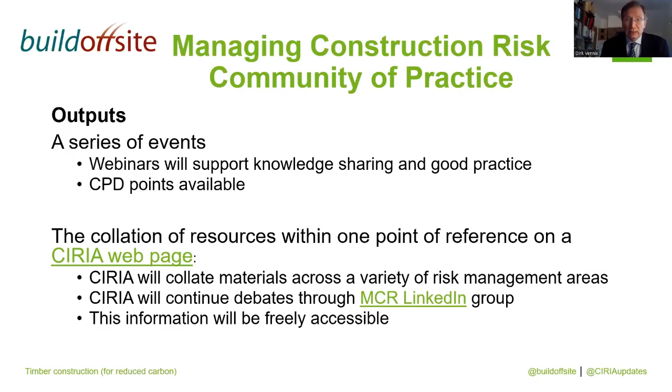We've put all the resources we can find - guidance, regulations, thought leadership articles - in one portal, which you can find on our resource page on the CIRIA website. We also have a debate going on in the LinkedIn space, so you can go to managing construction risk and join that group, and we will be putting some of the questions, if we don't get around to them, on that page later on.

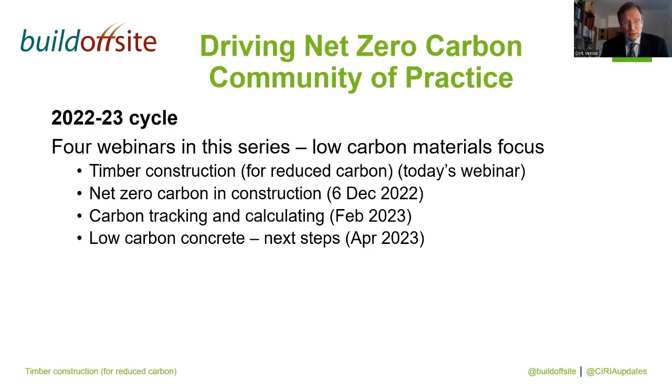One of the advantages of being involved in the forum is that you get to contribute, steer the agenda, speak at webinars, get involved with them, and possibly also help steer the guidance, because I mentioned the decarbonisation task force. Hopefully there'll be some guidance coming out of that to see a way through, which is often a quite crowded and dense market space.

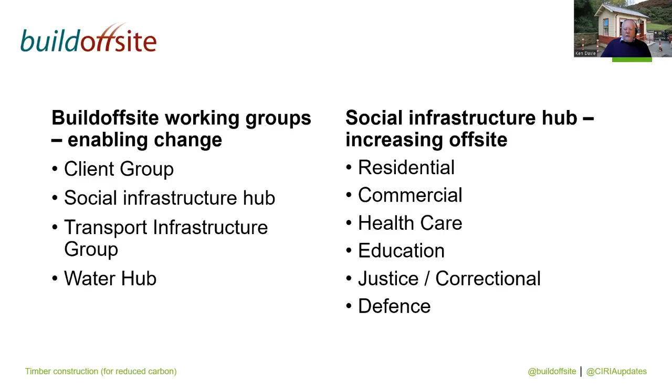But it's time to move on and to concentrate on the topic of this morning's webinar. This is our programme for the day. As you'll see, we've got 4 very interesting topics. Each speaker will be doing around 20 minutes. We keep our Q&A session to the end.

Our speaker lineup for this morning includes John Smith from Donaldson Timber, David Miller, and others - I won't actually read all the rest of this out. So at this point, I think we're ready to ask the first speaker to pick up the reins. John has considerable experience in the timber frame construction sector, having worked with Donaldson Timber for a long time. So I'd like now to hand over to John Smith.

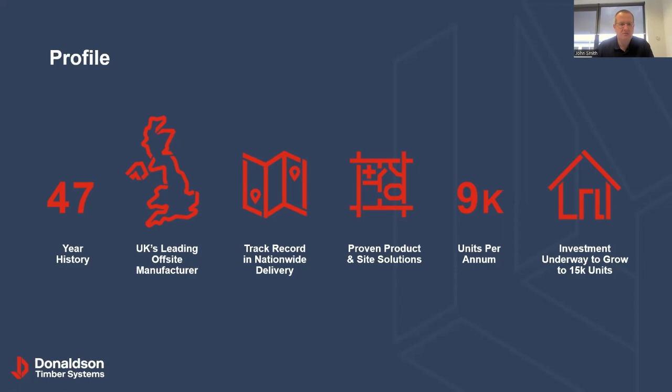I'll touch on some of the other tenures as I go through this morning. We cover UK-wide supply, with a range of products developed over the last 47 years, proven solutions for the offsite sector. Currently we manufacture and supply around 9,000 units a year, a unit being a house or an apartment, and we're investing to grow that over the next 5 years, up to around 15,000 units, with some innovation and advancements in our factories.

UK-wide, we've got 2 main hubs where we have our factories and back-of-house operations: one in Aberdeen, where the company was founded, with the factory and our design, procurement, HR and finance support teams, and another factory in Witney, just outside Oxford, which is now our head office, again with a similar setup of factory and full support team.

Our newest addition to the business was a spoke, if you like, in Falkirk—a manufacturing centre only, supported from the 2 main offices, local to where the work is. We also currently have 2 regional offices, one in Glasgow and one in Milton Keynes, which are office locations only, housing local business development, operations and design teams spread around the country.

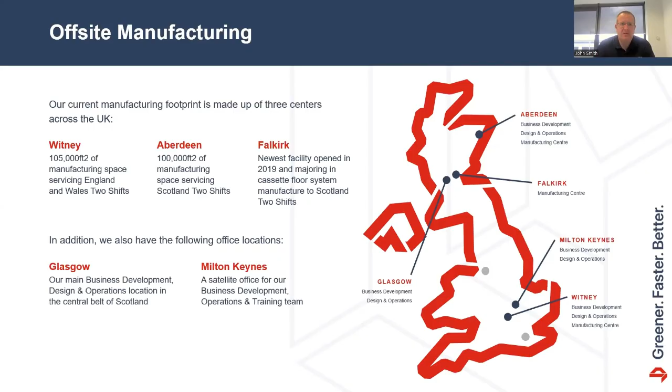The 2 grey dots on the map, one in the northwest, one in the southeast, are the locations identified in our proposals over the next 5 years to grow capacity—opening another couple of spokes so we can quickly establish manufacturing facilities close to where the volume of work is likely to be. They don't exist yet, but that's the plan, alongside investment in the factory, for how we grow capacity.

So a little bit about timber frame and what we've been doing for a number of years. Essentially it's manufactured in factories across the UK. As an industry we've probably got quite a wide range of factories, from fairly low-entry startup manual operations with saws, benches and people with nail guns manufacturing good quality timber frame, right up to where we sit at the end of the scale, with automation and fully automated lines manufacturing timber frame panels and floors.

Running through the system from top to bottom on the images: open panel walls are probably the mainstay of the timber frame market at the moment, and certainly have been for all the years we've been in it. Essentially stud frame walls manufactured in panels, delivered to site flat pack as the structural element of the building, with openings preformed for doors and windows.

More now, as we evolve and as regulations become more onerous, we're moving into closed panel external walls, which are becoming more common—again the same open panel, but with factory-applied insulation, factory-applied internal sheathing boards and service zones, and options for pre-fitted windows. Some companies then take that to the next stage: still timber frame, but with cladding on the outside of the walls, service conduit, and plasterboard on the internal walls.

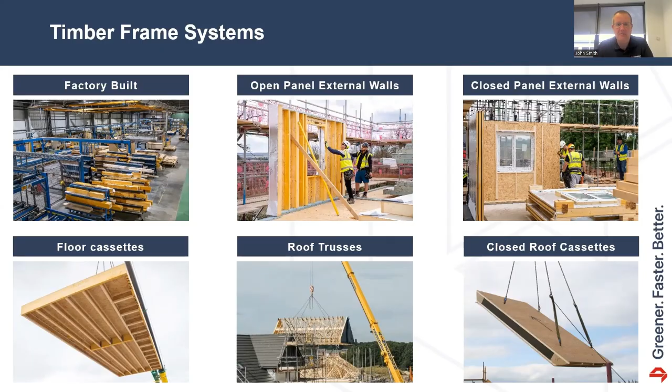Compared to what you'd normally see in a masonry build, that would probably be 6 or 7 weeks to get to that weather-tight stage.

The tenures that we work in across the construction industry, say timber frame, quite commonly used and has been in hotels, student accommodation type residential buildings, low-rise hospital, healthcare facilities, generally single-storey, sometimes 2-storey buildings, schools and colleges as well, quite common and suitable for timber frame.

But the main part of the market, and certainly the main part that we as Donaldson Timber Systems are involved in, is essentially around low-rise housing and low to medium-rise apartments.

Generally focused on apartments at 4-storey and below. We can and do up to essentially 6-storey. So we're at that below 18-metre height for timber frame.

To be practical, as a pure timber frame, there are other timber solutions that some other people are going to talk about this morning around mass timber and CLT, the like, that can go above that. But for our focus, timber frame is certainly below 18 metres, and the mainstay of the market is on housing and apartments.

In terms of the use of timber frame, I think as most people are probably aware, across the developed world, it's kind of the more common use of construction in Scandinavia, America, Canada, Australia, New Zealand, and the like. It's certainly the most common form of construction in various guises and prefabricated panels, as we do in the UK, to sometimes stick build on site and formed on site.

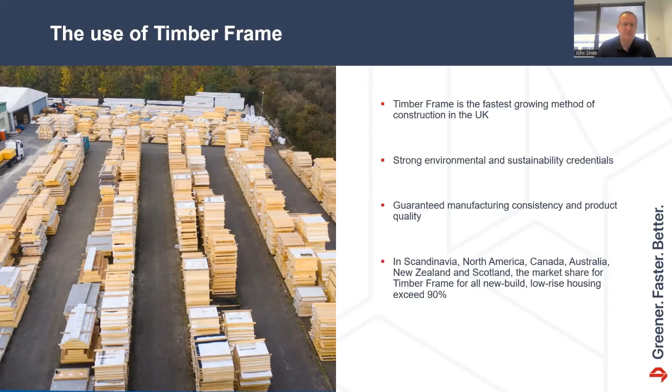And in terms of current volume, where we are, if you look at sort of pre-pandemic levels as the benchmark in 2019, we were up at around sort of 58,000 timber frame units built in the UK. So from a total that year of around 215,000 new housing starts, I think we're probably sitting about a 27% market share across the whole UK.

Scotland, as I said earlier, is a fairly steady market with about 90% of the new houses built, they are in timber frame. The growing market is in England as more and more builders transition over to that for a multitude of reasons that we'll touch on as we go through, and that's certainly growing.

And that's steadily growing from even just in 2016, at around 46,000 units, was about 25% market share, and continues to grow. And then starting a trend again as we recover from the lockdown of the pandemic, housing starts continue, we see that market share continuing to grow.

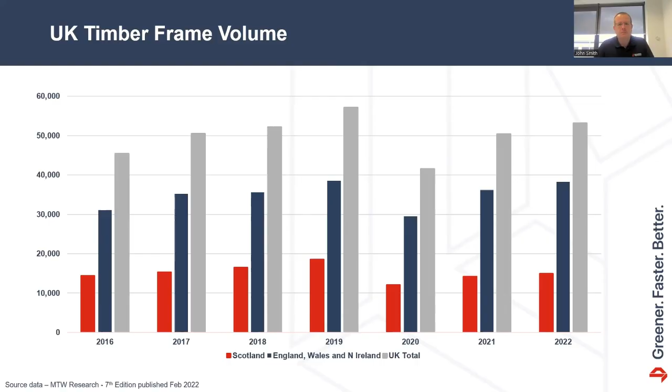They've done that for the last 2 years, and only earlier this year have announced that they're well through manufacturing, building a new factory themselves to increase further capacity in timber frame within Barratt's. We still work with Barratt's and supply a lot of their volume, and will continue to do so, but they're investing in it. Similarly, Miller Homes in Scotland, almost exactly a year ago, purchased a timber frame manufacturer. And in the last couple of months, Avant Homes have done similar. So some of the builders we're working with are looking at that as they work with us and other timber frame suppliers, but they're starting to invest in that as well.

And I think most encouragingly, just in the last number of weeks, Vistry Partnerships and their acquisition of Countryside. Countryside are a housing provider. They have their own timber frame facilities, and they had a facility in Bardon that they weren't going to take forward. Quite good news in the last couple of weeks that Vistry, through that partnership, have picked up that and confirmed that they're going to open that factory up, adding further capacity in the timber frame market over the next couple of years within their own new group.

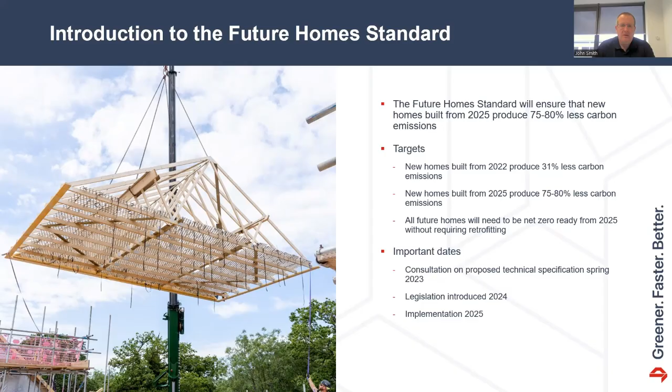Key factors in the standard: the overall target is to reduce carbon emissions by 75%, and within there are three measures. There's the primary energy measure, which is whichever fuel is used to generate the power, be that oil, gas, wind, or whatever, and that applies a fuel factor to how the emissions are targeted.

A measure on carbon emissions, which has always been the measure used through building regs for compliance with the requirements - essentially, as it suggests, that's the emissions from the fuel used to operate the home for heating, hot water, and power.

And thankfully, we've been lobbying for a while for the introduction of FEES, the Fabric Energy Efficiency Standard, which is essentially setting a minimum standard for a high-performing fabric. So it stops the temptation to just replace energy with green energy and still build lesser quality homes. The FEES standard essentially drives in a better standard.

For the technical people on the call, there are some target performance values. Those are likely to be the kind of levels we're looking at, but not defined yet - that'll be part of the consultation.

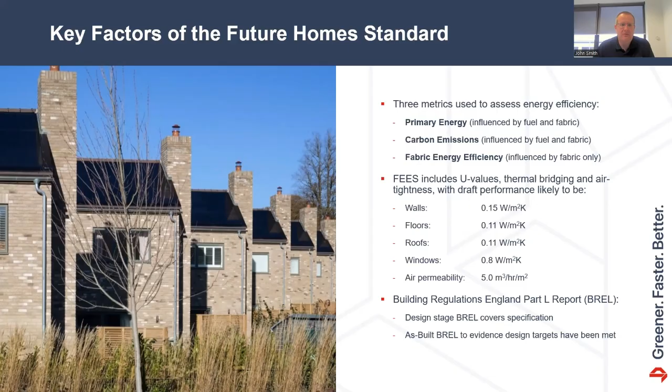And importantly, certainly for timber and timber frame, the introduction of the Building Regulations Part L report - essentially a two-stage process now in place under Part L 2022 - is two-stage checks: design stage compliance with requirements, but more importantly, an as-built evidence target, which includes photographic evidence of key thermal junctions to make sure the as-built performance achieves what the design intent has been. Again, it's a critical step to ensure there's no gap between design intent and as-built performance.

As I touched on, the Fabric Energy Efficiency Standards, or FEES - why is that important? I think it's really key because the target is to reduce the need for energy rather than just using low carbon energy. If we can take away that need by building better fabric, better thermally insulated houses, then that's a benefit.

But also with the very likely change of getting rid of things like gas boilers and the introduction of things like air source heat pumps - all these low carbon heat pumps like air source - they're essentially a low grade heat.

So you won't be able to leave the house over a weekend with no heating on, and when you come in the door, turn radiators on and heat the house up quickly. These things like air source heat pumps, anybody who's got underfloor heating will be the same - you need to keep the house at a fairly consistent temperature. So for them to be efficient, they need to be used in conjunction with a high performing fabric.

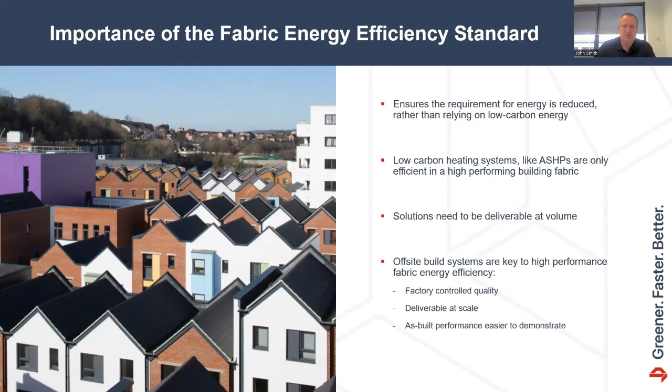And then moving on, embodied carbon - a very brief overview of what that is. Essentially, embodied carbon is the measure of all the carbon emissions for two stages, from cradle to completion, right from the extraction of raw materials. So be that mining ore to make steel, to cutting down trees for timber, all the way through to the construction and all the carbon emissions associated with transport and manufacture of products.

But also at the end of life, at the end of the asset use, be that the house or the building, in terms of a measure of the carbon emissions from demolition and disposal of the materials at the end of life.

Embodied carbon, I think, is key. It's not included as a measure in the future home standard. And I think that's a key thing to consider and make sure that we don't have any unintended consequence.

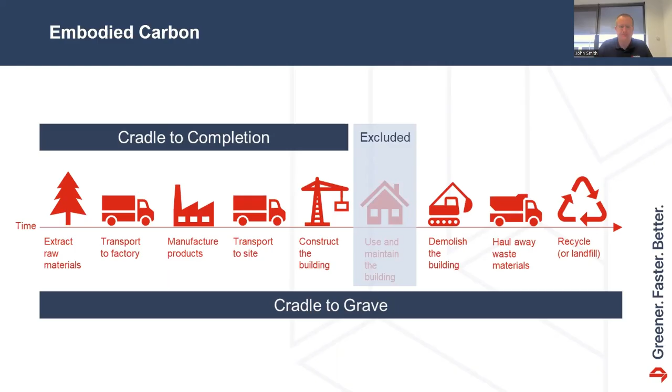Also included in the benefit of timber is carbon sequestration. Essentially, very clearly, when trees grow, they absorb carbon dioxide from the atmosphere, convert the carbon into fuel to grow the tree, and emit the oxygen. That carbon is then stored within the timber.

So very roughly, for every cubic meter of timber that's in existence, whether it be structural timber or any other use, it stores about a ton of carbon within that timber, and that's stored for the whole life of that timber. It holds it in there.

A typical new build detached home built to 2021 standards - whole life carbon, so that's the operational carbon of the home in terms of the 60 or 100 year life of the home for heating, power and maintenance, but also the embodied carbon from cradle to grave - typically is around 200 tonnes of carbon for the life of that home. Of that 200, 165 tonnes are the in-use energy, and 35 are the embodied carbon for the construction and disposal stage.

The point of embodied carbon not being included, going back to the future home standard I talked about - the target is 75% reduction of the operational carbon. So the 165 tonnes of operational carbon in the building, if we achieve everything that's in the future home standard, we reduce that by 75%, so that 165 tonnes becomes 40.

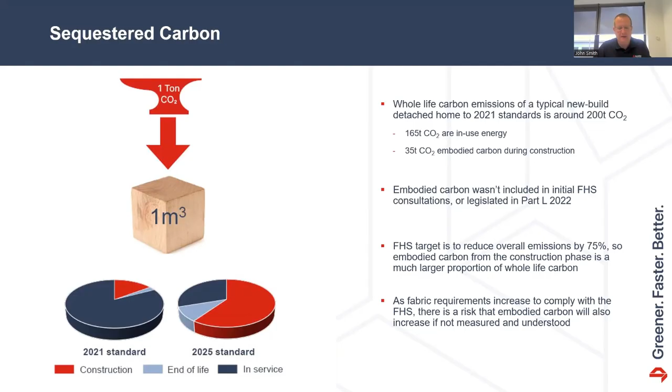In terms of timber frame, again based on 2021 building standards - so what we're building today and for the last number of years - a typical 3-bed end terrace house as an example, just measuring embodied carbon from cradle to completion, a timber frame house saves about 2.5 tonnes of carbon compared to the same masonry house, that being the same masonry house but to the same energy standard and the same performance.

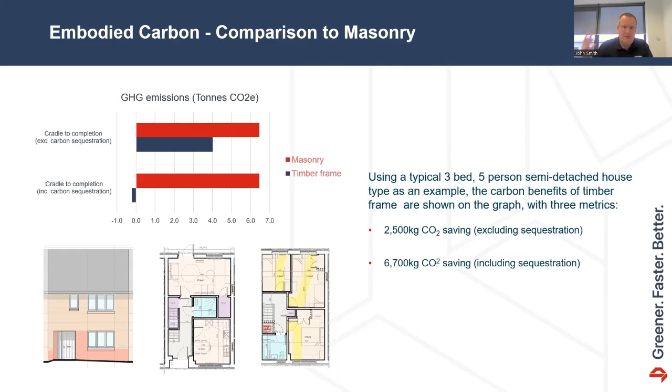If we can get to the stage of building the UK's target of 300,000 homes, with 50% of those being timber frame, we would take 1 million tonnes of carbon, of embodied carbon, out of the atmosphere every year just by converting houses to timber frame - let alone the operational carbon that the future home standard will also add.

Couple of other bits to close off, I think, that are relevant for timber and certainly in the residential sector: pre-manufactured value. A number of people are looking now to build more advanced products and MMC, modern methods of construction. Homes England, for example, have set a target for all the houses on their land: a minimum 25% of houses built on Homes England land should achieve what's called 55% pre-manufactured value.

Essentially, that's a calculation of how much of the gross construction cost to build that home is delivered through pre-manufactured products, be that a prefabricated stair flight, timber frame, or at the full end, a volumetric type building. That 55% target can be achieved through a closed panel timber frame with a pre-fitted window and probably a prefabricated foundation system, like a new span type floor, which will achieve between 56 and 58% pre-manufactured value. Again, that becomes quite important in terms of moving on to MMC.

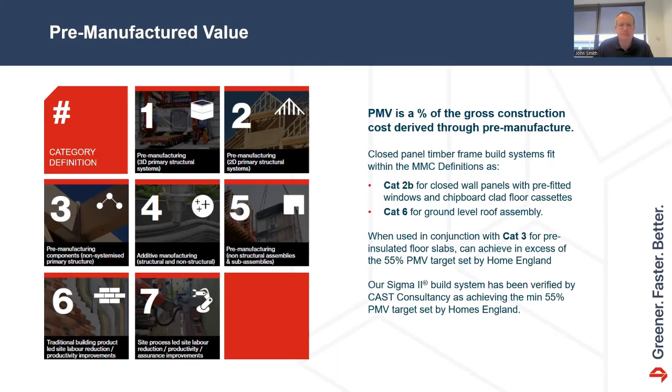As we progress through all these things, we've got a drive for more modern methods of construction, and rightly, a drive for better performing, more insulated buildings. I think rightly we're going to have more new products and new innovations coming to market. The real important part is that as a house building industry, we've got lots of very good quality controls and checkpoints in place, but they are currently very focused on the traditional method of building on site, where you can build something, somebody can come to site and check it, and then move to the next stage. That's just not the case with certain levels of off-site construction.

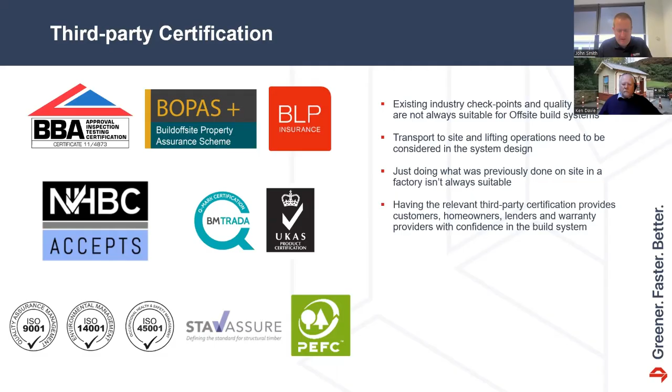This is where things like third-party certification become absolutely critical - all the things we have within Donaldson's - not just to give, in terms of a certification process, surety to customers and verifiers of the right product, but more so for lenders and insurers, that the product actually does what it says on the tin. Part of Buildoffsite, certainly BOPAS, we were an early adopter of that back in 2013/2014 with the first BOPAS scheme, and now BOPAS Plus. That's been instrumental in the development of our Sigma 2 closed panel system, giving people surety that the product's going to do what it needs to do.

I think that's your last. Oh, I was thinking that was your last slide, John, as we've just run over a couple of minutes. Yeah, just one very quick - I'll close off on this one, Ken, then I'll hand back.

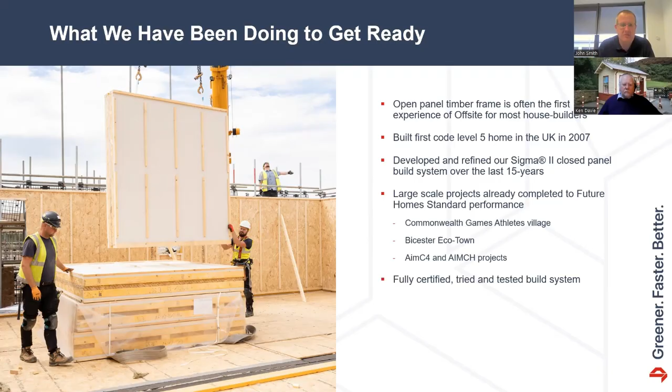I suppose where we are, I think out of this one bit I did want to pull out - we were already doing a number of large scale projects in timber frame at that future home standard. We built the Commonwealth Games Village in Glasgow in 2014 with timber, 700 houses, again built to zero, essentially the zero carbon measures in the future home standard, Bicester Eco-Town, etc. I think we've got that in there and the benefit of timber coming through. The last point for me was, I think timber in the residential sector - timber is the only real renewable volume building material, and with everything that's coming at us, I think there's a real opportunity for us to grow and move on.

That's great. Thanks very much. Thank you. Yeah, thank you.

We've got some questions already coming in. Somewhat remiss of me, I forgot to say that John's bio is actually posted in the chat box as a follow-up, given just a brief introduction this morning. Some fascinating figures on the carbon reduction in comparison with other methods of construction, and I think the maximum you can do in terms of PMV is something like 85%, but that's full modular volumetric. Yes. Yeah. Okay. Thanks very much, John.

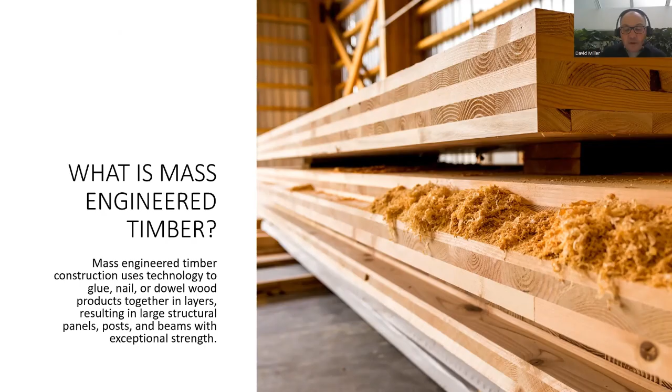Mass timber has enjoyed increasing popularity over the past decade, due mainly to growing concerns around the sustainability of building materials and an increased interest in prefabrication and off-site construction, which this technology is particularly well suited to. In this talk, I want to highlight the advantages and disadvantages of the technology and give you an insight from a designer's point of view on the design, fabrication and construction of a mass engineered timber building.

So really the starting point for us is, why do designers like this technology so much? There has to be more to it than it being sort of tactile. And this is actually an old photograph I found in the office of a couple of members of staff stroking a piece of CLT.

But the real value of the product is that it's engineered for very high strength, which makes it a realistic and practical alternative to carbon-intensive alternatives such as concrete and steel. Furthermore, because it's significantly lighter in weight, it reduces loads on the substructure, which again results in less concrete being used in the foundations, again with a knock-on carbon positive effect.

In addition to its practical advantages, mass timber presents the opportunity to express the structure and the materials that the building's made of. The idea of truth to materials runs deep in architectural training and theory, and it's very attractive to designers.

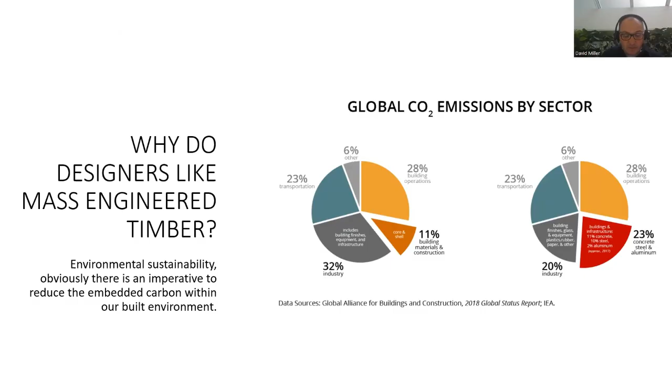So obviously the key driver must be sustainability. With 11% of global CO2 emissions being directly attributable to the construction of buildings, and 23% being as a consequence of the production of concrete, steel and aluminium, timber-based technology, with its potential to sequester carbon in its production, has to present a viable future alternative in construction.

So let's have a look at the advantages. Firstly, as already discussed, it's a viable low carbon alternative to concrete and steel. The managed production of the raw material sequesters carbon during its growth.

The off-site prefabrication process gives the opportunity to take the frame of the building off the critical path of a construction project, which can reduce the time on site and associated costs and prelims. Again, the factory-based prefabrication process creates a product with very high tolerances, which has many positive knock-on effects further into the construction, and I hope to be able to show you some of those further on.

The on-site phase, as well as being much shorter, creates less noise and dust, which is particularly advantageous on occupied sites or sites in tight urban locations. And the tight tolerances and solid panel construction gives us a very good air tightness in the finished building.

In addition, the thermal qualities of the material help reduce thermal bridging issues, making robust details much easier to achieve. The dry construction method also leads to reduced moisture on the site. And there's a confidence in the dimensional accuracy, which allows doors and windows to be ordered in advance and brought to site just in time, rather than waiting for construction to progress to measure up before ordering.

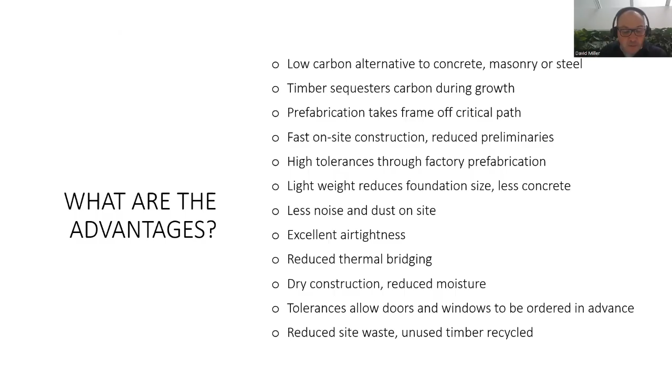And finally, the accurate prefabrication reduces waste on site, and the unused timber in the factory is recycled. So that's the good news.

What about the disadvantages? Firstly, it's a comparatively new form of construction in the UK, which can generate nervousness and resistance to its adoption.

Detailed design needs to be completed much earlier. Late changes are more difficult to accommodate, which brings the effort curve further forward in the design process. We would argue that this is not necessarily a bad thing, and with the imminent changes to the construction environment as a consequence of the Building Safety Act, it's a situation that the industry needs to adapt to anyway.

From a design point of view, specialist input, whether through early contractor involvement or the appointment of specialist consultants, is required early in the design phase to ensure that the design is right first time.

The building technique is less flexible and adaptable once built, so any future fit ideas need to be considered in advance and built into the design. The system requires external insulation and cladding, but it does form a very robust background without voids for external wall systems to be fixed to.

Another issue is, although the engineered timber is kiln dried, the timber is still a natural material, and stability and movement of the frame needs to be considered and factored into the design. It's much more mobile than more traditional methods of construction, and I think this highlights the need to work with specialists early in the process.

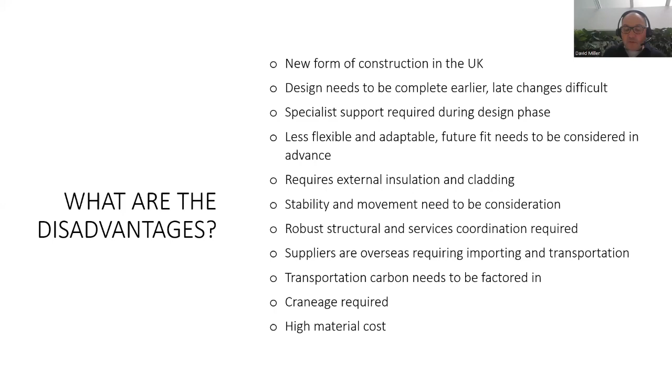And finally, the material costs can appear quite high in comparison to other materials on a simple like-for-like basis. So when evaluating cost, it's necessary to factor in reduced substructure costs and the potential time savings on site and the implications that would have on the prelims.

So I'd like to consider why mass engineered timber works so well with digital design and construction, which has obviously lots of other positive knock-on effects for the process.

So to do this, I'd like to follow a specific project through the design, fabrication and construction on site. The project we're using is a school project called Mayfield, which is a new secondary school built in East London and completed about 8 years ago.

Mayfield was a DFE funded school, which for various reasons had to be designed and constructed within 18 months, including the planning application and all stakeholder engagement. So it was a very fast project. We don't think that this would have been possible without bringing together digital design techniques and off-site construction. And it was a very early decision to look at cross-laminated timber for its construction.

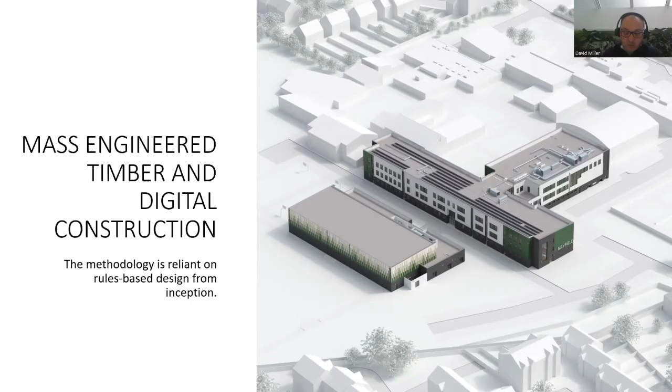Really the key element here is the need for a rules-based design from the outset. So as well as talking about off-site construction, this is really a call for platform design.

In this project, what we were able to do was adapt our already existing client-specific digital kit of parts, which had been evolved and refined over a number of previous school projects, and then absorb into that a rule set given to us by the specialist engineer. This ensured that we were designing within the limitations of the CLT frame.

At this point, there were no specialist suppliers in mind, so the rule set was broad enough to be adaptable to the potential fabricators in the marketplace. So again, this relied very heavily on the input of the specialist engineer, who was, in this case, Ramboll.

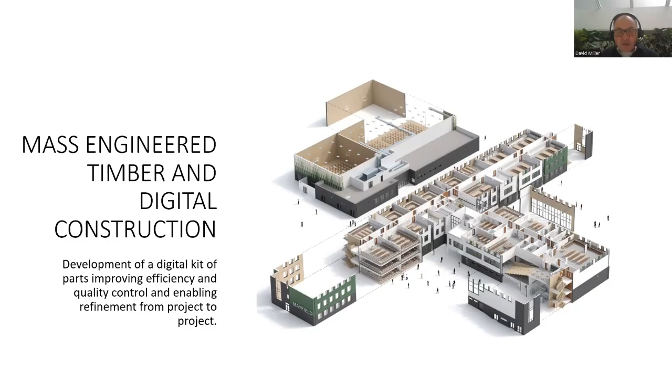This approach with the kit of parts allows us to rapidly assemble a proposal, and it empowers early and effective stakeholder engagement. It allows us to work very close to real time with the same information in the engagement with the stakeholders that we're ultimately going to use to fabricate the building. So a change in the model at this point will be reflected further down the line, and it gives us a good quality control line.

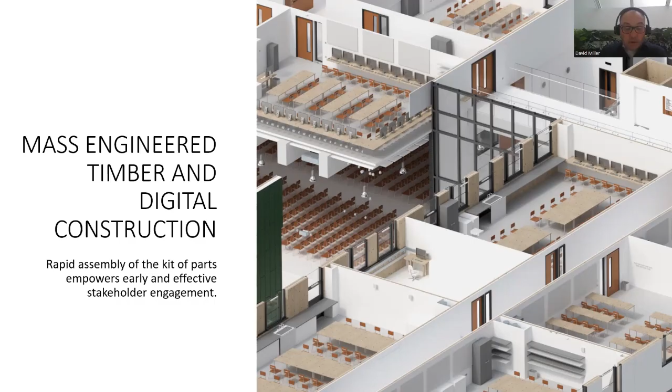As is normal in a building information project, all of the coordination of the structure, the MEP and the architecture was completed in a federated model. But it was at this point that we started to realize how much more effective this process was using cross-laminated timber. The solid nature of the CLT panels makes the coordination of the builder's work openings much more straightforward.

And again, using a rule set for openings generated by the specialist consultant gives us a much more robustly coordinated model.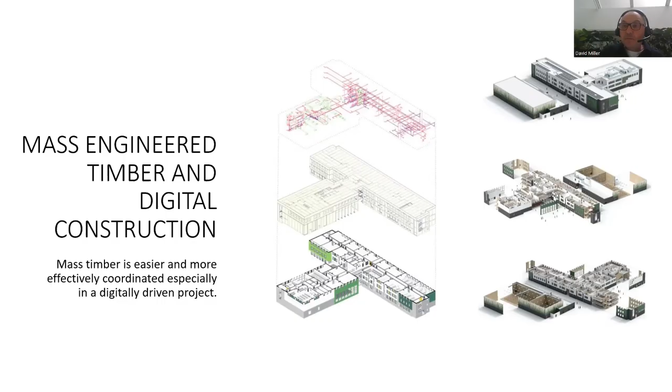Similarly, the solid nature of the structure enabled robust performance analysis, whether that be thermal, acoustic or fire, and again, because there are no voids to consider or factor in. It will be interesting to see how this evolves now that embodied carbon calculators are becoming a much more important part of the decision-making process on projects at the early stage.

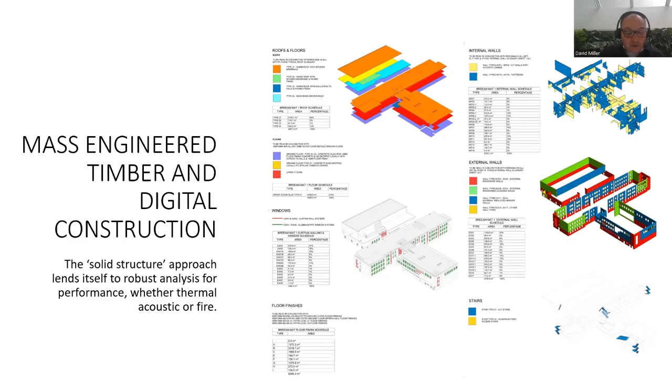So having completed the analysis and the three-dimensional spatial coordination within the BIM, it's a simple step to isolate the timber core in order to start the processing of that for fabrication.

That model, once isolated, can be digitally augmented with the cutting details and element addresses required for the fabrication process. We've been able to make changes to the model all the way up to this point, but changes after this point can become more problematic and costly.

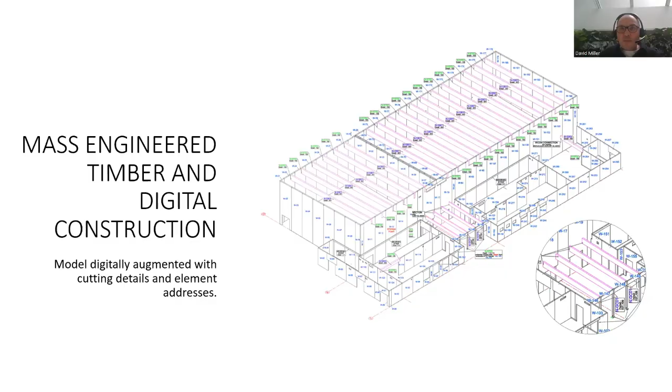That digital model is then used to drive the CNC machines, in this case at the KLH factory in Austria. The slot in the factory has been aligned to the construction program on site as closely as possible, to allow for just-in-time delivery and avoid storage and double handling of the units. The frame for this fairly large secondary school went through the factory in a matter of days, which was very exciting.

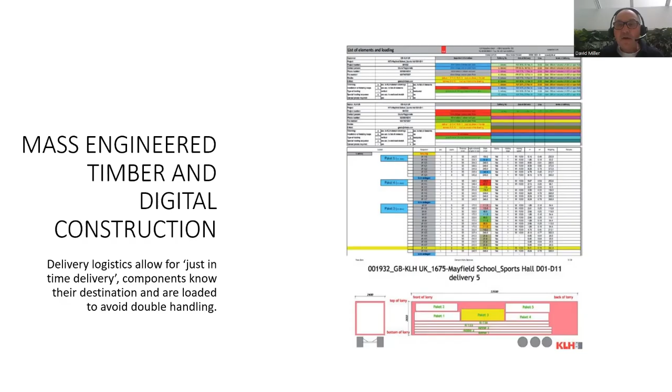The delivery logistics are developed using the model as well, to ensure the right components are arriving at site at the right time. Load sheets are developed to ensure the elements are in the right part of the lorry for when they're unloaded on site. At Mayfield there were 51 deliveries, 45 for the school building, 6 for the sports hall. Because the products are flat packed and the predefined panel widths are 3.5 meters, the loads are very efficient, with very little wasted space on the lorries.

Once on site, the assembly is very rapid indeed. From a health and safety point of view, it's a very safe site. At this point there's only really the specialist subcontractor on site. It's a very controlled environment, with little or no requirement for temporary works. For example, the balustrades and fall arrest systems are fitted to the external wall panels before they're lifted into place, generating a safe working platform for the next floor.

On this project, the entire frame was erected in 12 weeks. Bearing in mind that the fabrication has been completed off the critical path, the frame can follow the groundworks immediately, so you can again see there's another advantage for the construction program.

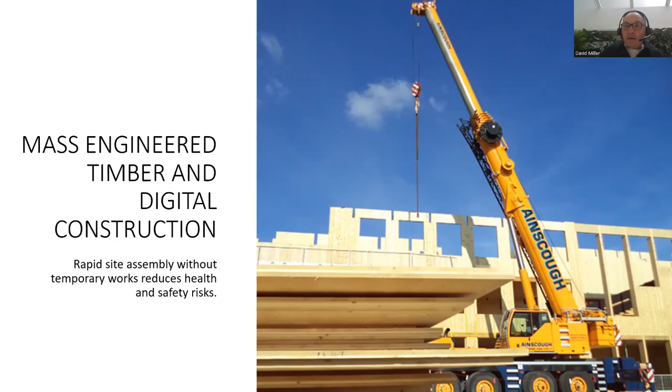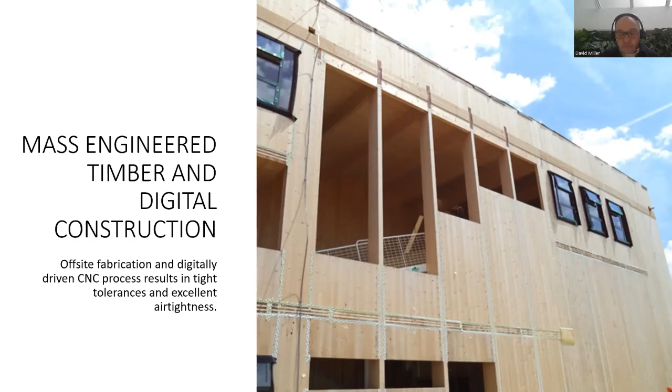We talked earlier about the tolerances that can be achieved, and I think this photograph shows that. You can see the main contractor was able to procure windows and doors in advance of the frame being completed, confident that they were going to fit. And you can see the advantages in terms of air tightness and cold bridging, because there are very few gaps, and that solid wall construction behind it.

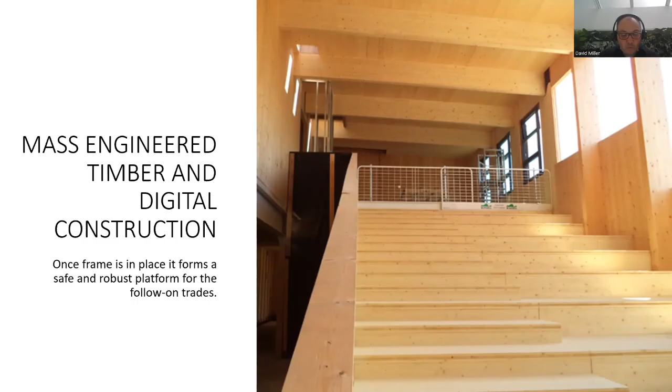Once the frame is in place, not only is a very large portion of the building complete, but the frame provides a very safe and robust working platform for the follow-on trades. A priority, however, is to waterproof the roof to protect the structure below as quickly as possible. Once that's done, it's a very comfortable working environment.

So in terms of outcome, the ability to expose some of the timber adds warmth and quality to what could be very everyday spaces, remembering this is a state school built to a very tight DFE budget. We're quite sure that this improves the learning environment.

It's also worth pointing out that the exposed timber finish is exceptionally robust and hard wearing, which means it's particularly well suited to stairwells and areas where there's potential impact damage.

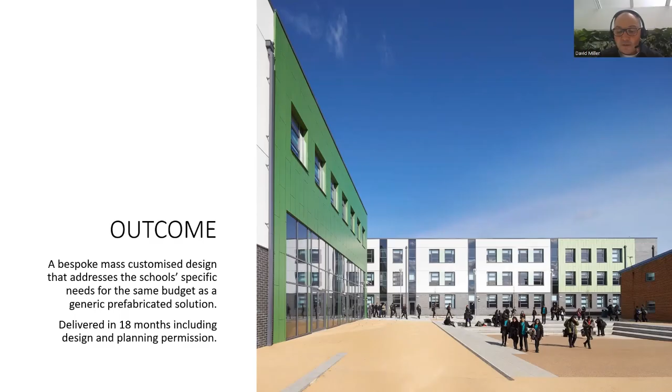To conclude, I think Mayfield School demonstrates that by bringing together mass engineered timber and digital design, there's an opportunity to offer a bespoke, mass customized solution that addresses specific needs for a tight budget and avoids the need for a generic solution. Thank you for listening.

Thank you, David. Fascinating project, with rather nice warm material when you actually see the timber. I believe there are 3 different grades in terms of what's visible.

Yes, and you would select the highest grade for the areas that are to be exposed. I think the only limitation on transport is the length of the panels in terms of what you can get on a standard trailer. The width of the panels is dictated by the width of the trailer, and the panels can be almost any length at all, so it's ultimately the length of the trailer that dictates that.

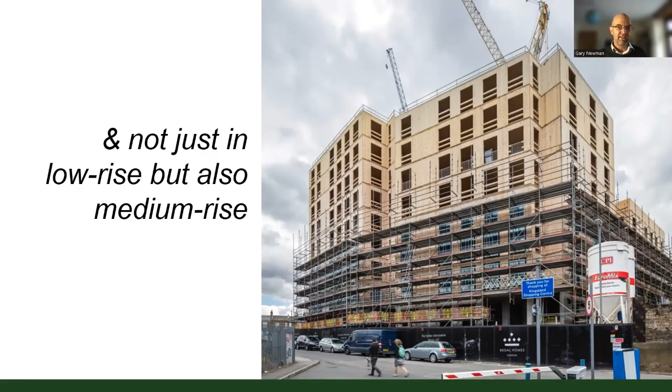And you've heard a bit about CLT, so I don't need to dwell on that. But, you know, low rise, medium rise, possibly even high rise construction enables steel and cement to be displaced. Then we have natural insulations that can help us move away from petrochemical plastics, and modified timber products, although this isn't grown in the UK.

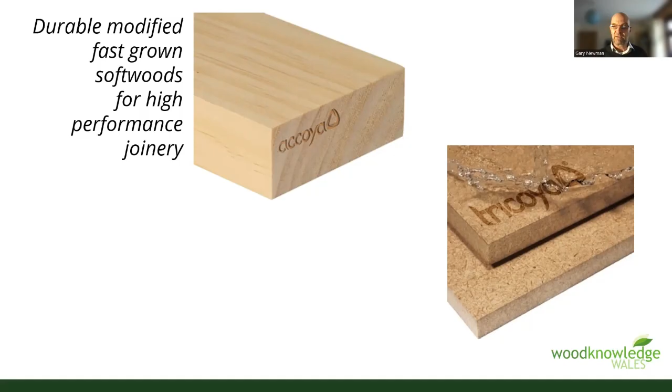Accoya is a chemically modified timber that makes it hydrophobic, which makes it incredibly stable. It's available not only in solid wood, but also in MDF, which they now guarantee a 50-year life in external environments, which is quite staggering, and it's non-toxic as well, so it can go straight back into the circular economy timber recycling supply chain. So all sorts of new and exciting things possible with wood.

Now, just a little bit about Wood Knowledge Wales. As I said right at the beginning, we're a community benefit society, a type of co-op. Our vision is Wales as a thriving, socially just, zero carbon, high value forest nation. We're certainly not currently a forest nation.

We're a sheep, beef and dairy nation. We have 9 million sheep in Wales, 3 million people, and they're incredibly environmentally damaging and entirely dependent on subsidy for maintaining them, whereas forestry is actually an economically viable enterprise. But it's a big cultural shift in terms of land use. We're also a steel nation. You know, Port Talbot Steelworks, we identify with the heavy industries. And timber hasn't even really been considered an industry in Wales until recently, and I'll come to that.

So our work is really focused on supporting the development of Wales' forest industries, but not in a representative body way, in a way that meets the needs of future society, which is quite a challenge to the timber industry, as well as it is to sheep, beef and dairy and steel. So what do we do? We tend to drive innovation through collaboration up and down and across the supply chain. We focus on knowledge creation and exchange, very much like CIRIA. Political advocacy as well, to influence government decisions, and on occasion we get our hands dirty at the coalface if nobody else is prepared to do things or doesn't see the economic potential.

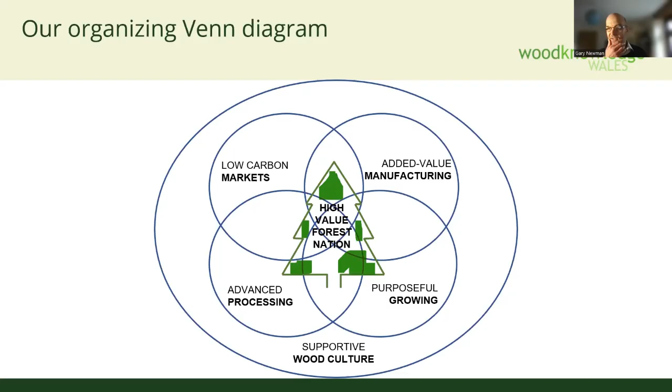And then all of that needs to be supported by a wood culture that understands productive forestry, that understands that trees need to be cut down. We haven't really got that in the UK at the moment, so I think forestry is really poorly understood.

So our guiding question in the Homegrown Homes project was: how can the Welsh timber supply chain be transformed to deliver zero carbon homes affordably at scale?

The policy environment we drew upon to communicate the importance of this was the low carbon agenda. Growing trees, everybody knows, is a climate change mitigation opportunity, and so is the use of timber—that's less well known, but equally well supported by the big climate bodies, the UKCCC and UNFCCC. The people who say what we should be doing and set targets are very encouraging of the shift towards timber in construction. Off-site manufacturing, as you've heard, is a key agenda across England, Scotland and Wales.

And the foundational economy—you might not have heard of that agenda—is very much about how or where you focus your economic attention. It's encouraging a focus on those aspects of the economy that improve people's lives: food, housing, health, education, infrastructure. That's about 50% of Welsh GDP. The other 50% is the more typical things that get policy attention, such as British Volt or anything else like that, which may or may not succeed but only benefits the people working in and around the factory, whereas foundational economy activities benefit everybody because they improve lives.

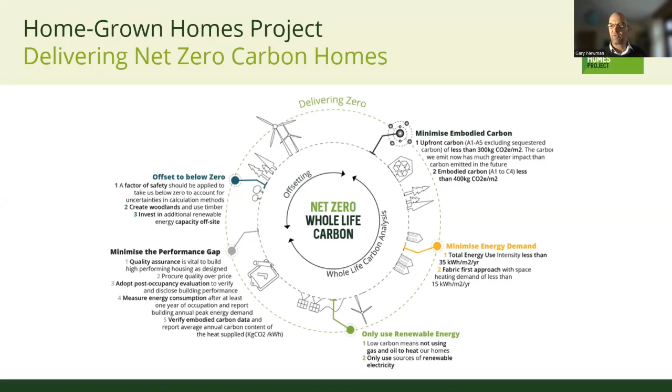We created a net zero carbon infographic showing the role timber can play in achieving net zero carbon: from embodied carbon reduction, minimizing energy demand through a high performance fabric, only using renewable energy, addressing the performance gap through things like offsite construction, measurement, post-completion monitoring, and offsetting to below zero. Forestry is a well-established means of offsetting. We also think carbon storage in the built environment can be developed, and we're working hard to see that become a thing.

So drawing to some kind of conclusion, I'll take you quickly through the outputs. We produced three specification guides. The first is timber cladding—changing the external skin of a building is one of the best ways to reduce embodied carbon, so moving to timber.

The second is wooden windows. The Welsh Government actually pays for about 70,000 plastic windows to go to landfill every year through their social housing refurbishment grants and new build, which seems to me wholly unsustainable. So we need to move to timber windows.

Equally, plastic insulants don't seem to be the right way to go. If you're championing the use of wood and then combining it with lots of plastic, that's disappointing. So we need to be moving to wood fiber insulation. There's no UK manufacturing at the moment, but I think that will change in the coming years.

We produced embodied carbon guidance for housing associations so they can begin to understand it, measure it and reduce it. We also produce building performance guidance on how to understand, design, manufacture and prove that your buildings actually are low carbon, low energy and actually work.

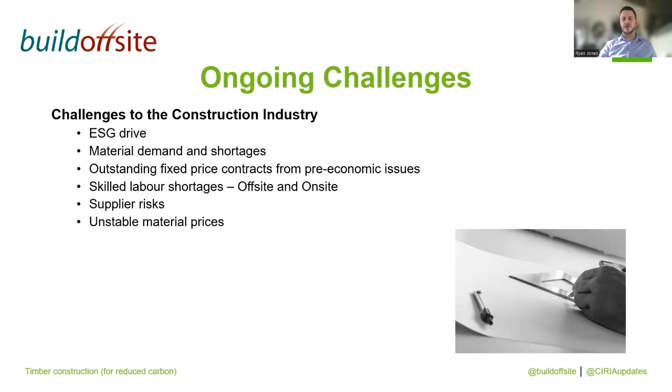Okay, so we move on to the construction insurance challenges. What we are seeing - and this is everybody - is ambitious architecture. I think that's one way of putting it. I'm sure we've all seen it. We've either spoken to the architects directly, or we've seen some of these plans to make the world a better place, a different place. All of these brand new, lovely buildings, new materials, new methods. Some with focus on ESG, others simply for aesthetic appeal. Other times to suit the surrounding environment and areas. Some of which are probably eye-catching - it's one way of putting it.

The plans, they're different. They're definitely a challenge now, not just for the contractors, but also for the insurance in the background. As insurance companies, we generally steer clear of speculative risks. However, the boundaries that we're seeing at the moment are definitely being pushed by the architects and engineers, all with the aim to make better places.

The issue we've got is that there's a big, probably case of the unknown. There's something new, something different. We're no longer looking at the brick, block, concrete, steel that we used to. No longer materials solely being used in the same way that we're used to them being used. No longer low-rise timber or timber frame housing that we're used to. We're now looking at mass timber, larger structures. So the boundaries now are being well and truly pushed.

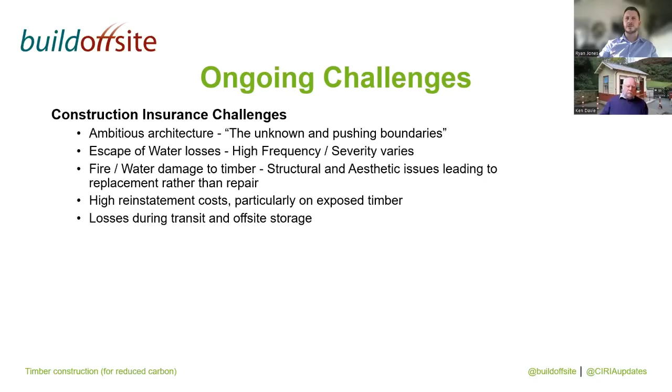That's just gone 12:05. So if you could summarise, Ryan, please. Yeah, no problem, we'll move on.

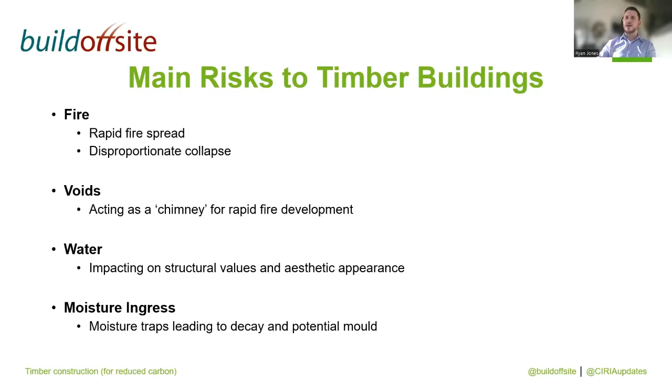So your main risks in terms of timber buildings are fire - so fire spread, your voids where they can create a chimney effect - water which can affect your structural values, and then your moisture side of it as well.

Your fire management plans - what's key at the moment is this new JCOP that's been released. There's a link in the presentation as well. This heavily needs to be considered. We're discussing this with contractors all the time now, and it contains things like your fire watch periods, temporary accommodation, and some other major changes - all different things that really need to be considered.

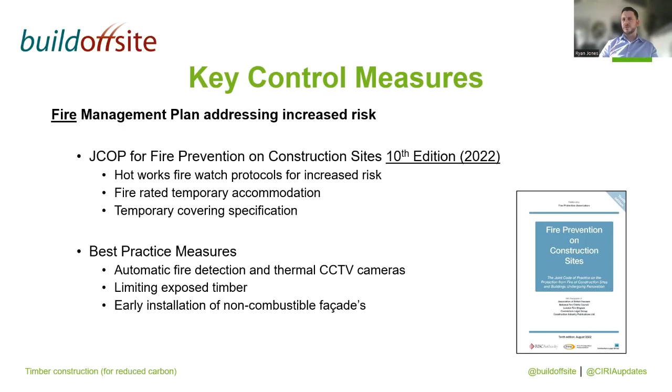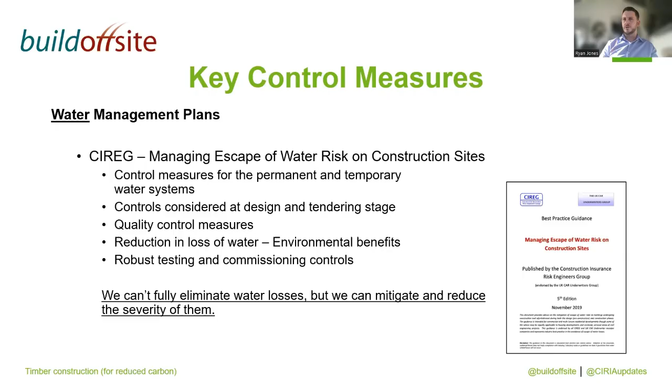On the water side, you've got the CIREG management plan for your water management. I'm part of the CIREG group as well, so we've developed this template plan. It's in use by a lot of contractors and, to be honest, it's a very good document. This contains your control measures - what you need to consider is your permanent and temporary systems, and then the controls you're going to put in place. From there, you've got your moisture control plans.

Your moisture control plans, particularly on timber when it's being delivered to site - how is it going to be managed? Whether that be moisture monitoring, and again, speak to the specialists about this. What you need to make sure is that it's being covered at all stages, from off-site to delivery to installation. How long is that timber going to be exposed? Can we get the envelope on - all of your walls and your roof - as early as possible to reduce the effects on the timber? And consider things like leak detection as well. It's all best practice.

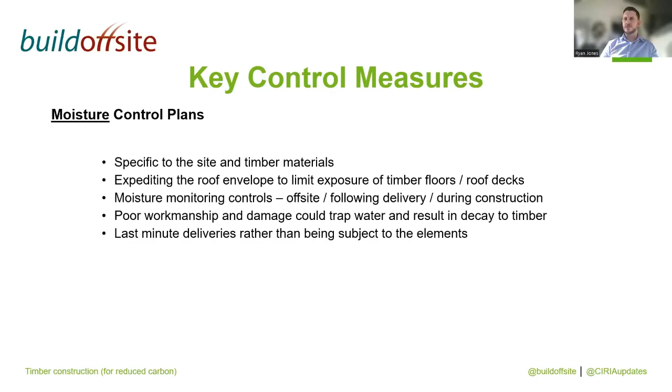Additional bits of best practice - you've got your STA guidance on the 16 steps. Other parts you can consider are about incline roofs - again, speak to the specialists on that. We're finding that, especially on mass timber buildings, ideally it'd be incline roofs, but these are conversations you'd have to have with the architects, as they do like flat roofs, especially in city centres. But again, at all times, speak to the specialist and try to recommend inclines.

Where you can, eliminate hot works or reduce them. Off-site storage of materials and combustibles - do you need those materials on site at that time, or can they literally be last-minute deliveries, which is often the best case. Robust security measures as well - remember the main risk in terms of security quite often is kids getting onto site, that's usually what happens, mostly unauthorized access, but also consider arsonists and people intentionally going to cause damage. Other parts are about your waterproofing and your waste management controls.